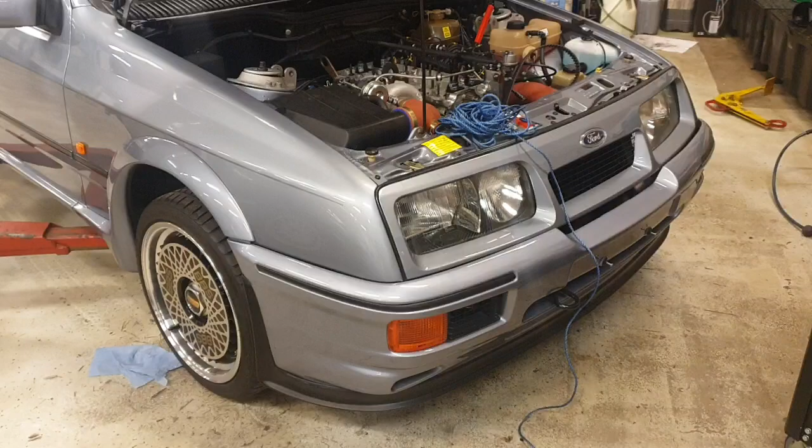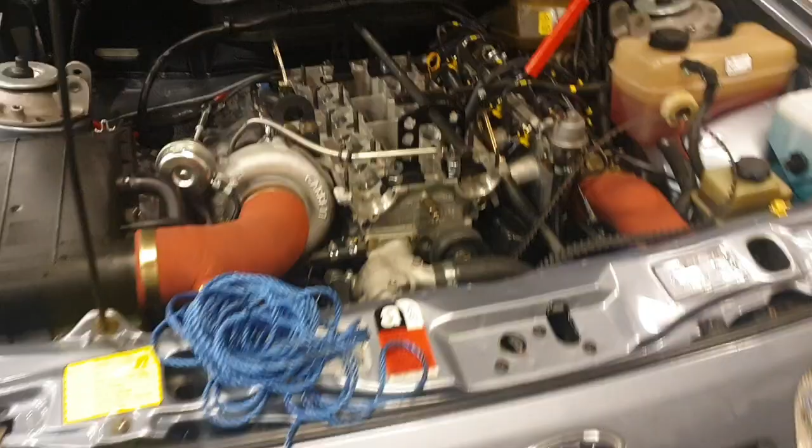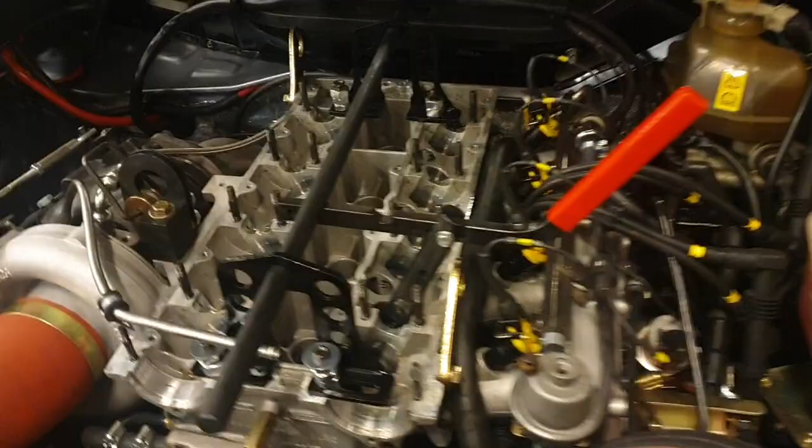Today, I wanted to give you a little update on the blue smoke issue on overrun that I've been having on my freshly rebuilt Cosworth engine in my Moonstone Blue Cosworth. I'm not sure what I'm going to show you here, apart from my actual findings, and also maybe show you real quick how I did this valve stem seal replacement, which is what I've been doing.

In my previous video, I took you along for a diagnostic session where I used this inspection camera to see behind the inlet valves, to see if I could see any oil residue on the back side of the valve head. I could see that, and that led me to think I have a valve stem seal or valve guide issue.

So I decided to replace the valve stem seals, because that's a job you can do without more work than this — you don't have to take the engine apart. That's another thing I'm going to show you.

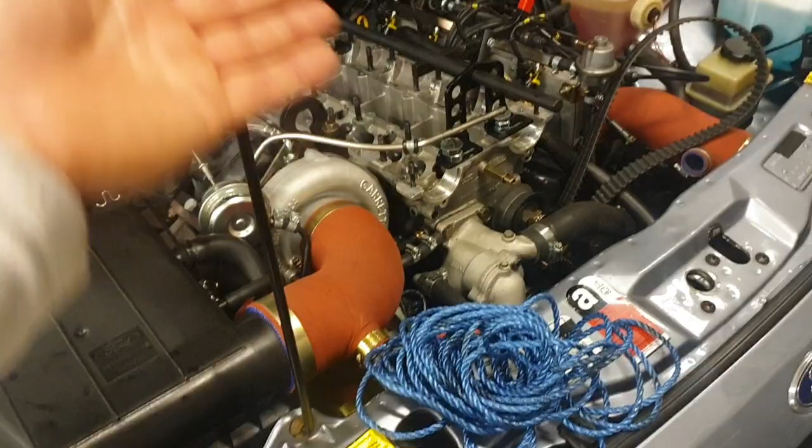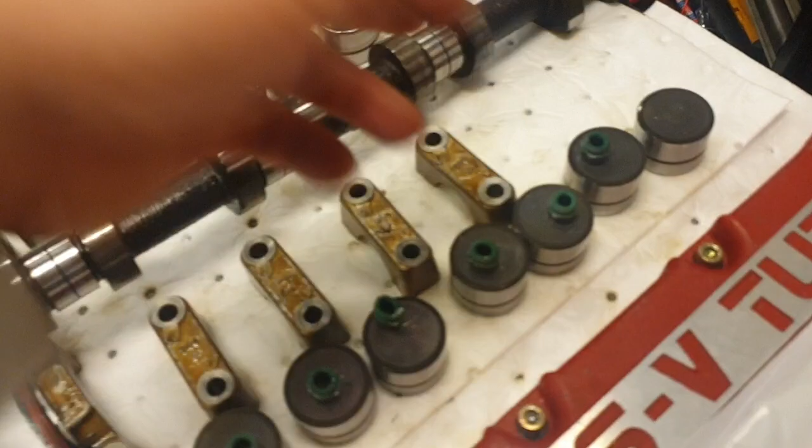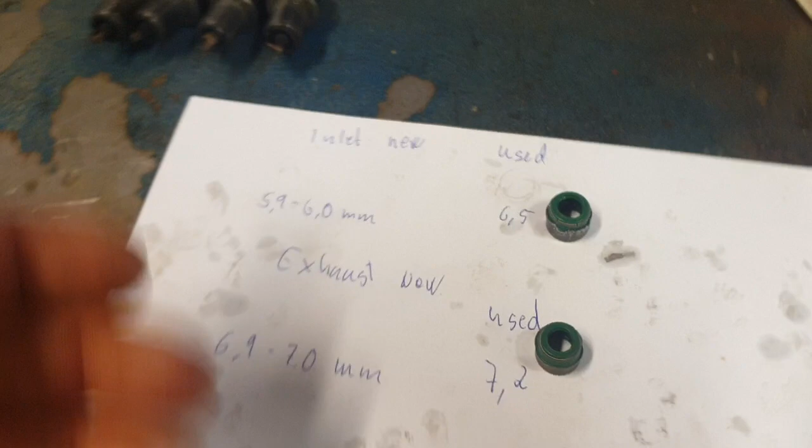Afterwards, we'll have a look at the stem seals I removed from this engine. I've already completed the work, so I don't have the new parts to show you, only the old stem seals, so they don't look exactly pretty. But I used the best examples here to do my measurements, comparing the new ones I put in with the old ones.

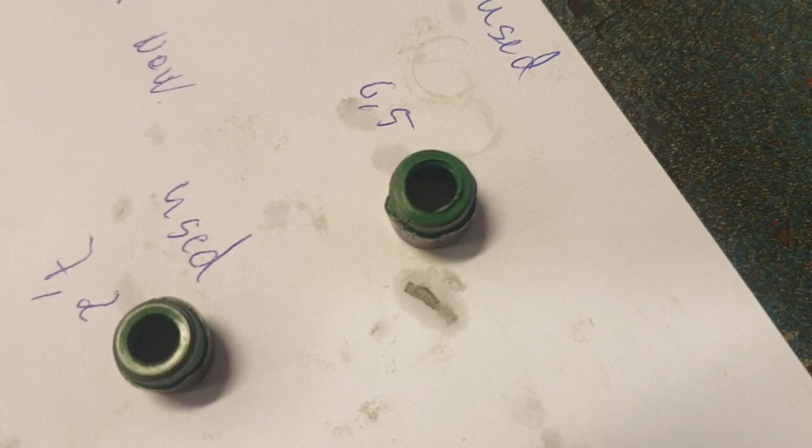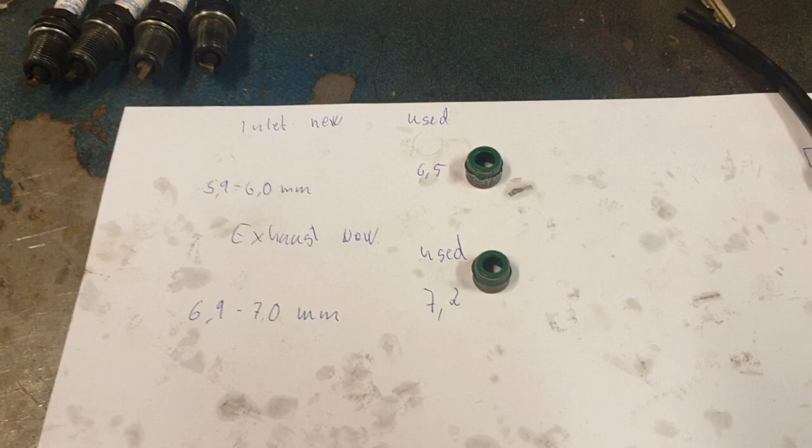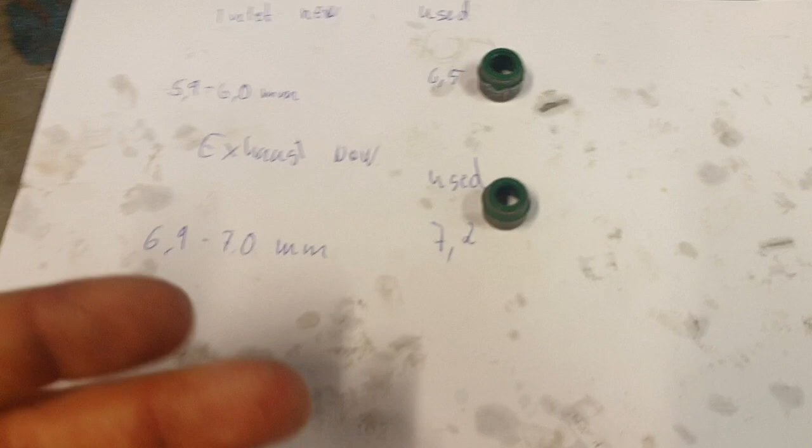You can see they're pretty much round, so I was able to get a good measurement of the diameter. One of my theories before starting this work was that maybe my engine builder put the exhaust and inlet valve stem seals on the wrong side, swapping them. I found out that's not possible, because the diameter of these two seals are different, so you can't fit an exhaust stem seal on the inlet side and vice versa.

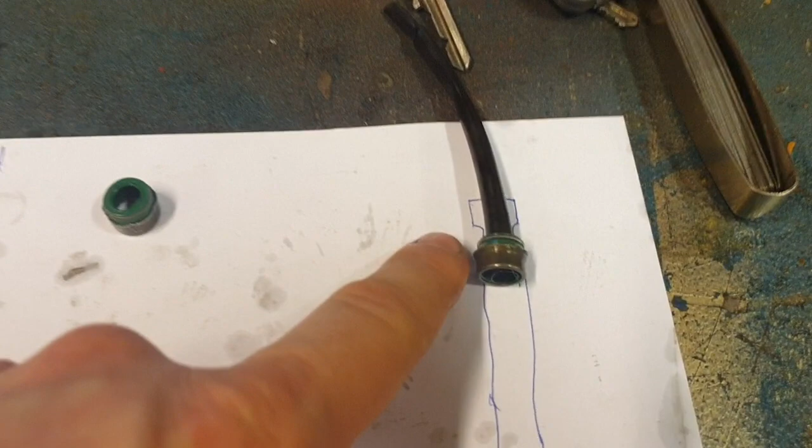One would be a loose fit and the other won't fit at all. So that's ruled out of the equation. I'm left with either my engine builder scoring the inside of the new valve stem seals when he mounted them, or I have poor quality valve stem seals.

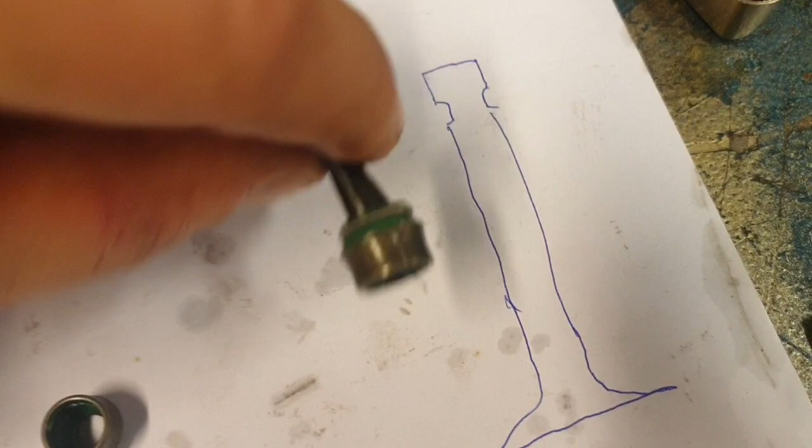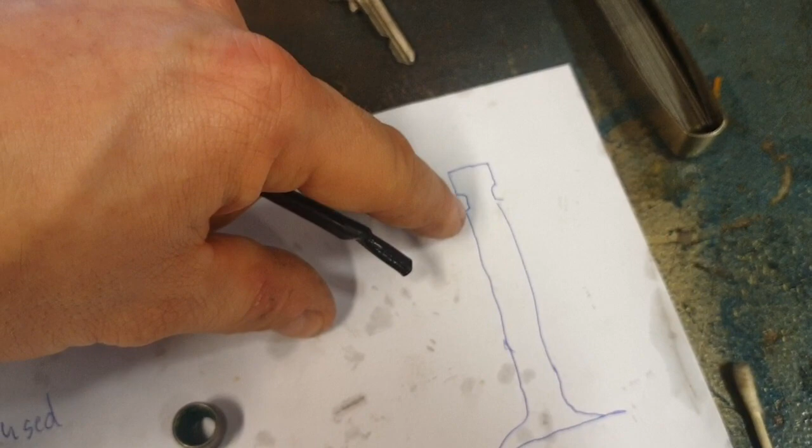How you should mount a valve stem seal is to use a sleeve like this — you can make them out of shrink tube like I did. You put that shrink tube or straw over the valve, so when pushing the valve stem seal over this edge or ridge, you won't scratch up the inside of the seal, which could have happened in this case. But I can't confirm that, because I couldn't get it off without scratching it.

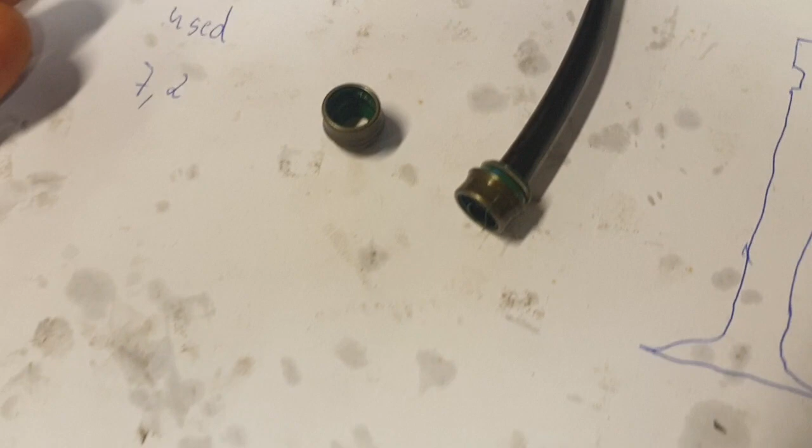So it's a possibility, because it's very weird that I only had issues on a couple of cylinders and not all of them. I only had an issue on cylinders 1, 2, and 4, and only one valve per cylinder.

I haven't checked the exhaust valve stem seals, but they're not under suspicion because there's no vacuum on the exhaust side like there is on the inlet side. As long as I only had the blue smoke on overrun, that means there's vacuum on that side drawing oil past the inlet valve stem seals.

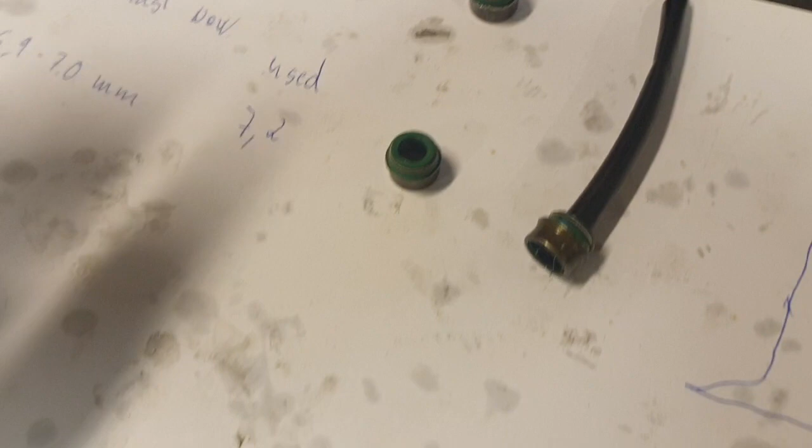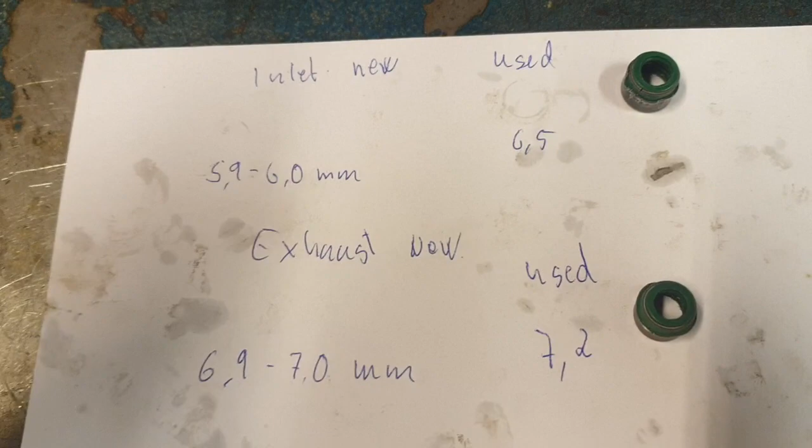So that leaves me with basically the quality of the stem seals. As you can see from the measurements I did, the new ones I mounted were Elring ones, a very nice brand of sealing rings and gaskets, supposedly original like Ford ones, but I don't know if Ford has Elring. Anyway, they're Elring and a high quality brand.

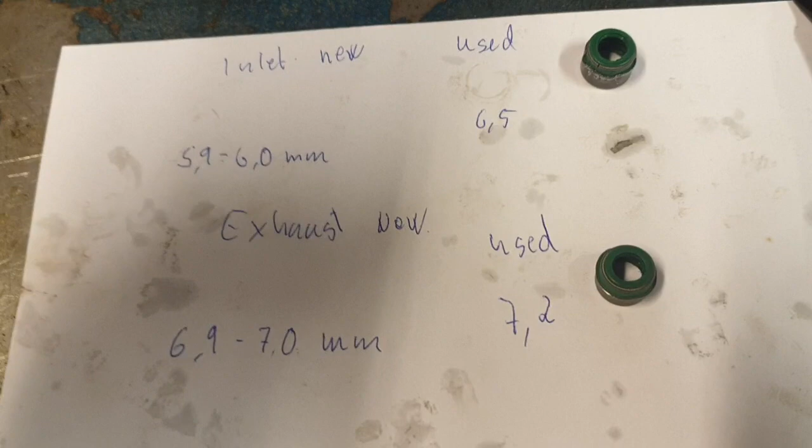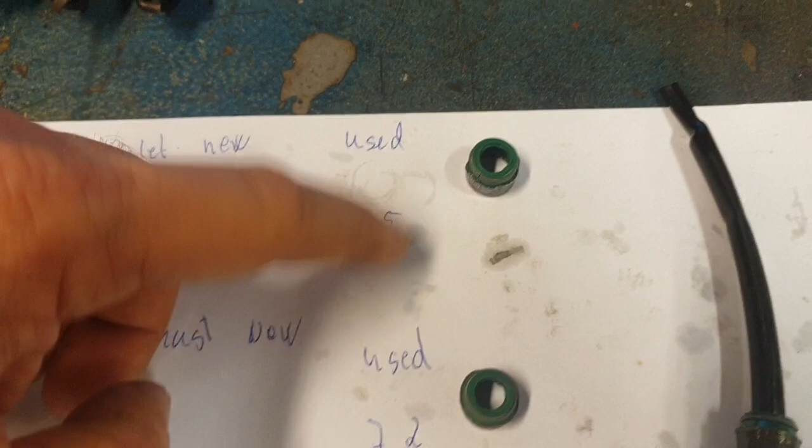I measured the inlet ones at 6mm, and the used ones, you can see here, at 6.5mm — 0.5 millimeters larger diameter. That's a lot when you consider how small these dimensions are. With these being 0.5 millimeters larger, it's quite a lot, and I think that might be the culprit.

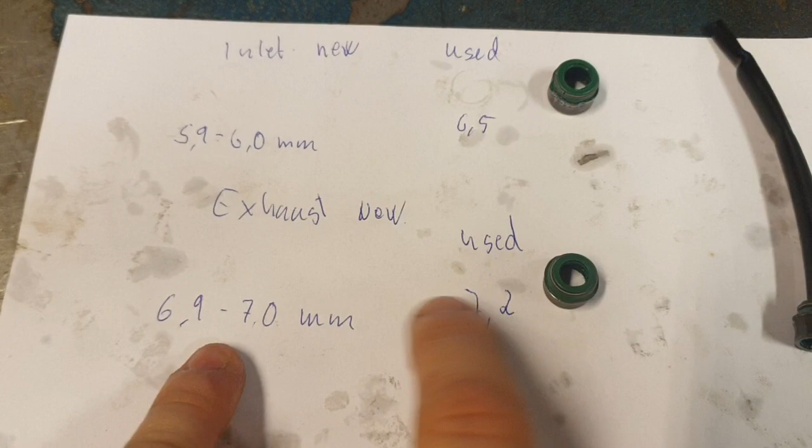As you can see on the exhaust ones, the new ones I put in were about 7 millimeters, and the used one was 7.2. That isn't that much.

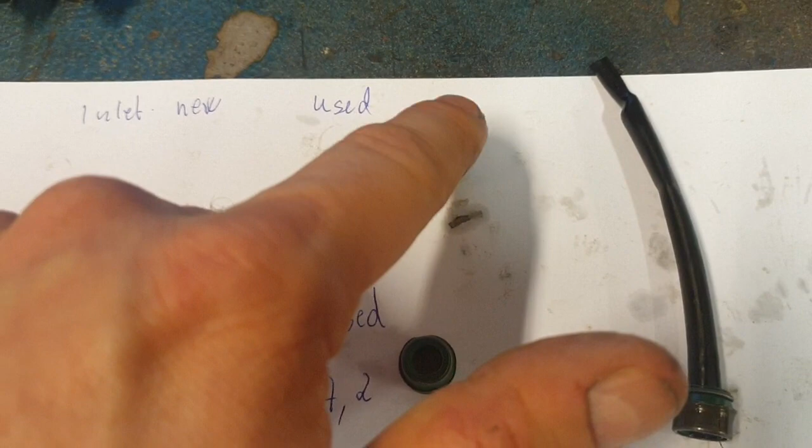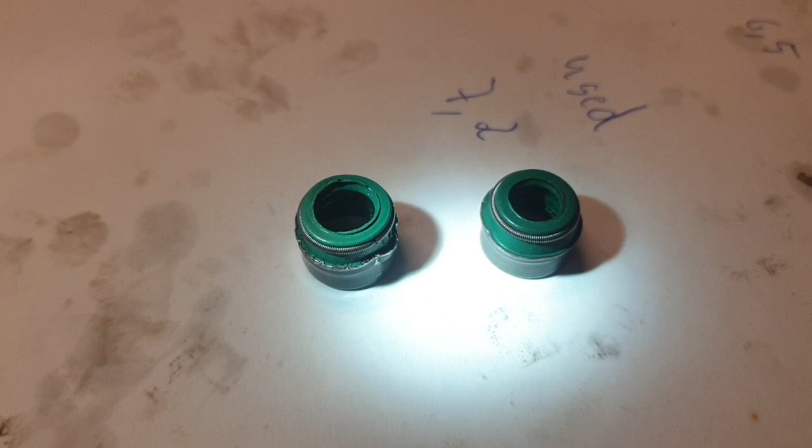I'm sticking to my theory that it's poor quality stem seals that may have caused this blue smoke and overrun issue. I'm pretty disappointed because I bought this as a complete engine kit with Victor Reinz head gasket and seals, and I really thought these were Victor Reinz stem seals, but it turns out they are not. If it was Victor Reinz, it would say so on the top edge, not on the side. But on these, there's not a single number or brand on them. So these are no-name brand sealing rings, and I hate getting no-name parts. It's just a sign of them being cheap and poor quality.

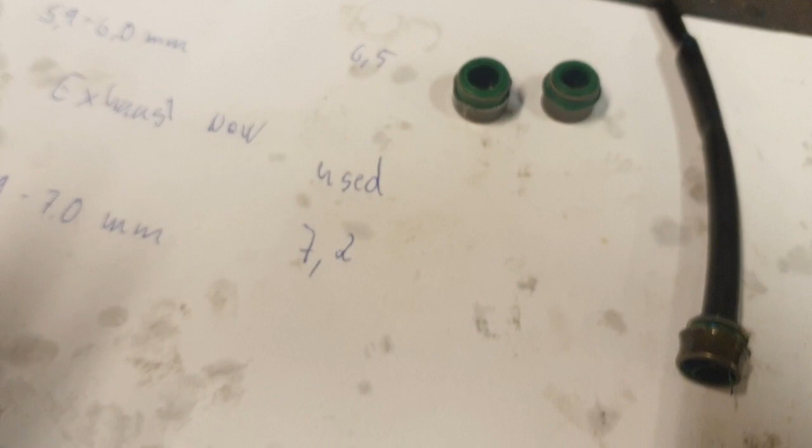So that leaves me with saying that things are the way they are. I'm crossing my fingers that when I start up the car and go through a little heat cycle, it will show that my blue smoke issue is not there anymore. I will update you when I do that.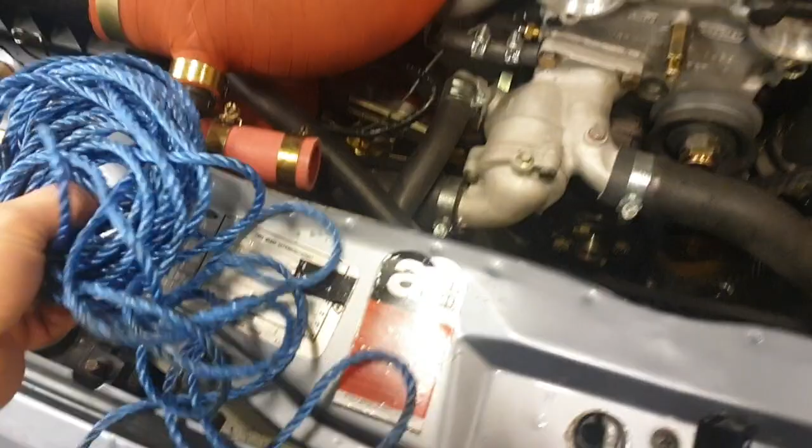Now I just want to talk real quick about how I did the work replacing these valve stem seals, because you can do it without taking the head off. I used the hack method, even though the correct method is to put pressure into the cylinder while changing the stem seals to make sure the valves won't fall in. But I don't trust that method - I'm afraid of losing air pressure while pushing down the valve to release the retainer, and the valve could fall in. So I decided to dig in and find other ways, and I found this hack method to be perfect. I'm confident you don't damage anything inside the engine using this.

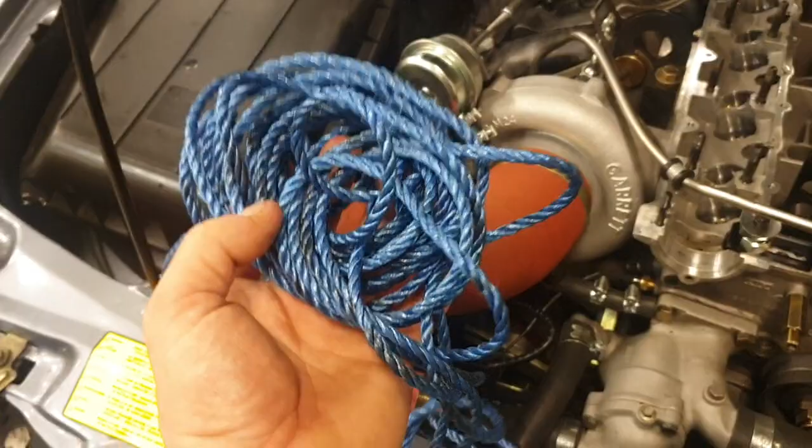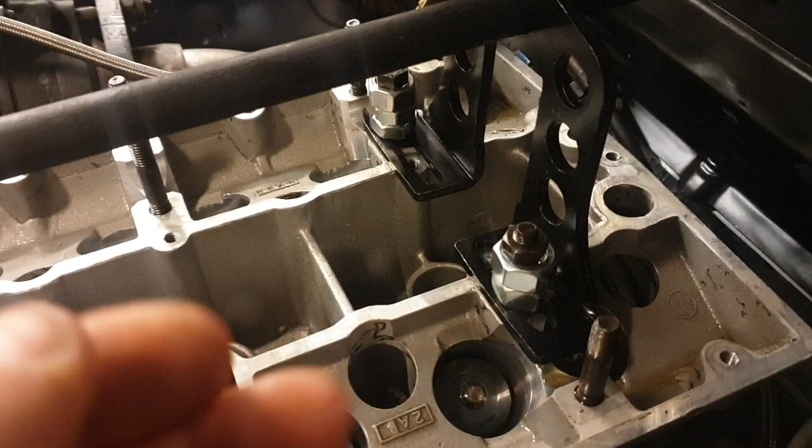This is a nylon rope. Make sure you use a nylon rope for this method, because there's no debris coming off it, and it's solid, soft, and dampens when it's in the cylinder being pushed up toward the valves. It wouldn't damage anything. One thing to remember before calling this a bad method: when the valves are unloaded like this, they're not sticking out like they would if the cams were on - they're sitting up in their valve seat. So putting in the rope just makes sure the valves stay in the valve seat. You're not bending anything, just giving it a push so they stay in place and don't fall into the cylinder. It's a perfectly sound method, just make sure you use new nylon rope with no contamination.

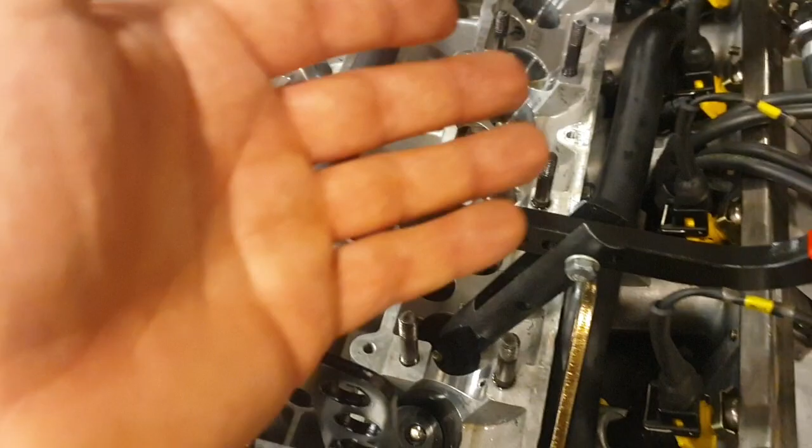The other thing is this tool, a very cheap tool I got just for this job - we don't have this type of tool where I work, so I bought this simple setup. Make sure you use a magnet down there when you pop off the retainers. To loosen the retainers, you don't just pull the valve spring down, you have to give it a knock to break it free. Also pay attention to covering up all the holes around, so if the retainer pops out it won't fall into the engine and get lost. It's better to lose it on the ground than into the engine. Make sure you cover every hole before working on each valve.

Better to be safe than sorry. So people, I think that is about it.

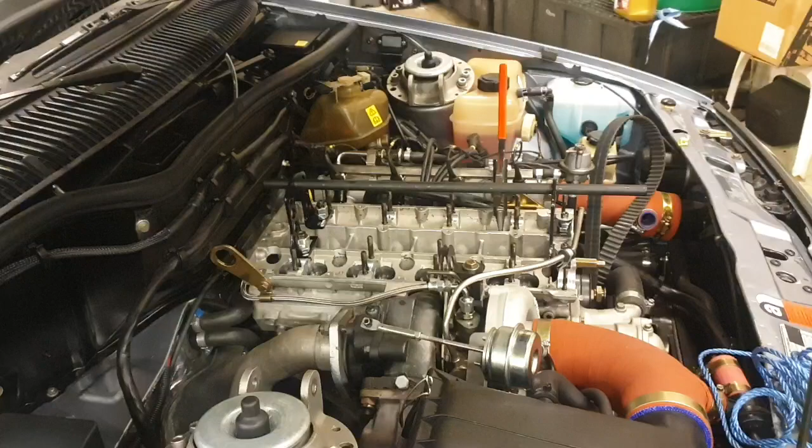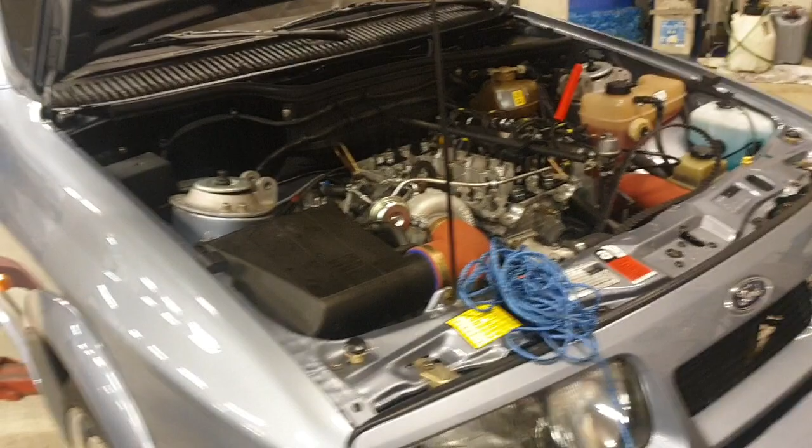I have a lot of other stuff to do with this car now during Christmas holidays. I took some extra days off work to work on my car, so I'm pretty excited to do some work now, even though I wish I didn't have to do this type of work, which is kind of unnecessary when it's just been rebuilt. It kind of sucks, but you have to stay positive, and it's soon to be 2020, so I'm looking forward to the next season, and it's gonna be great.